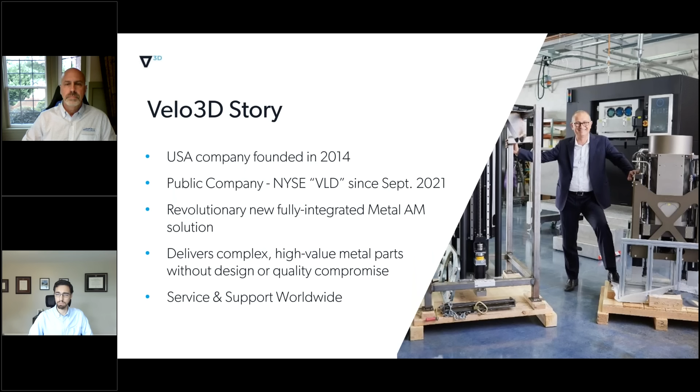Our intent was really to do a better job of managing the process that incumbent powder bed systems were deploying at the time. We quickly realized that we simply could not get to where we wanted to be with the hardware that was available at the time. So we ended up becoming a hardware company, and now we produce what we call a full stack solution, or an end-to-end manufacturing solution. We develop our software, our processes, and our equipment, all of our hardware, completely in-house, based in San Jose, California, with a fully US-based manufacturing team. Although we do support customers in Europe and in East Asia, so Japan, South Korea, and also Australia.

A little more about the type of companies that we work with. So we're predominantly an aerospace and defense company, although we do work extensively with some energy and oil and gas companies, as well as some other companies here and there. Most of who we work with, I would say maybe 50–60%, are in the launch space. So we work with a lot of launch companies, both new and old.

A lot of the folks that we work with are producing what we call high-value end-use components. So anything really in propulsion systems, thrust chambers, anything regeneratively cooled, different types of impellers, mixers, pre-burners, things of that nature. We also work with a lot of gas turbine companies, both for aviation and also energy generation.

We have a network of contract manufacturers that exist within the aerospace and defense supply base that have a variety of broad capabilities, not just additive capabilities, but they're CNC shops. They do a lot of post-processing, heat treatment, etc. That set of contract manufacturers also works with some of these customers who don't necessarily have systems in-house. So whether you're an OEM, or whether you are badged to the DoD and you're in supply depot or your procurement, there's lots of ways to work with Velo.

You don't necessarily have to have a system on site or in-house to get some parts made.

One thing I'll say is when you think about what a metal additive part is, one of the things we try to do as a company is demonstrate that we're not just making brackets anymore. We're not doing simple things, and we're not necessarily doing rapid prototyping for the sake of rapid prototyping. We're focused on producing high-value end-use components, things that go into propulsion systems, things that manage fluid, things that transfer heat. These are mission-critical parts that need very high standards of quality, typically certified by the FAA, NASA, or an equivalent DoD scheme, and they're things that typically haven't been done in a production setting with additive before.

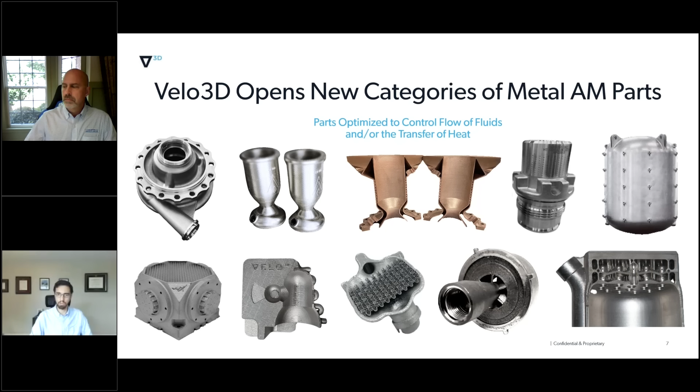The last thing that might be of interest to this crowd is we're a fully US-based company. We were founded in San Jose. We have an entirely US-based engineering team. The vast majority of our supply chain is also US-based, so most of our subcomponents we source from American or at least North American vendors. The things we do get from Asia, like chips, we get predominantly from South Korea, almost entirely. And all of our systems are manufactured in Fremont, California, which happens to be across the highway from the Tesla factory, which is kind of cool.

So that's all I'll say about Velo. And Gary, on to you. Have you switched the slide, Louise? There we go, okay, I did.

Yep, got it. So Hartech Group, we work exclusively with the federal government, specifically the DoD and a little bit with the DOE. We were born out of a need from the federal government for install and complete turnkey installations. What I mean by that, I'll give an example: we just put a large gantry CNC mill in at Tinker Air Force Base, and we did all of the concrete work, the electrical, the rigging, and the install of the machine. So when we were finished, it was a complete turnkey. We turned the keys over to the operators. They were trained, the maintenance people were trained, and they were up and running.

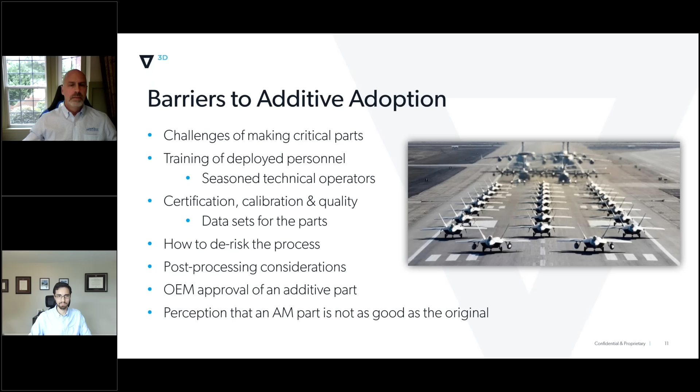Yeah, powder bed, which is all that we really do, I think the application for very near-theater is not quite there yet, just because of the operational complexities of the system. But when you talk about depots having spares, like MRO applications, where you need to get a spare out, and that spare might have been a casting, and God knows what that supply chain is like here in the States or somewhere else - that use case is kind of hitting the nail on the head when it comes to good use cases for powder bed fusion.

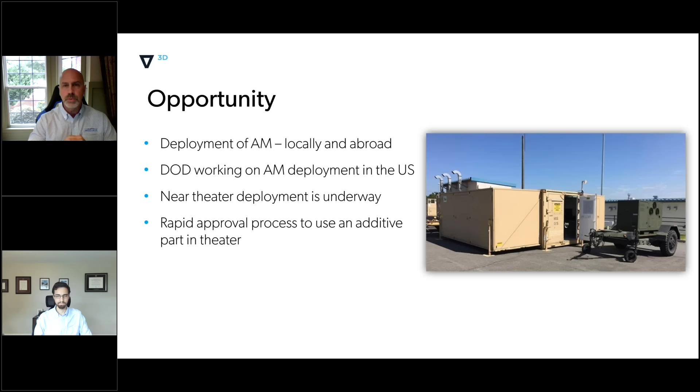Then the rapid approval process - we did touch on that a little on the first slide. There are different levels within the DoD and different branches - Army, Navy, Air Force, Marines - all have their levels of approval to get an additive part on. They're ramping that approval up in a lot of cases because they're having success stories. They see what an AM part can do for them. So I'm very happy to see that AM is pushing forward and moving as quickly as possible within the DoD.

All right, so we're going to move into a couple slides here where I'll just take the conversation that Gary and I just had and kind of retell it in the framework of Velo. So we've got a few problems and we have quite a few opportunities. And how does Velo address some of these problems, and how can we address some of these opportunities? I think we're taking questions as we go along, so if you do have questions, feel free to ask them.

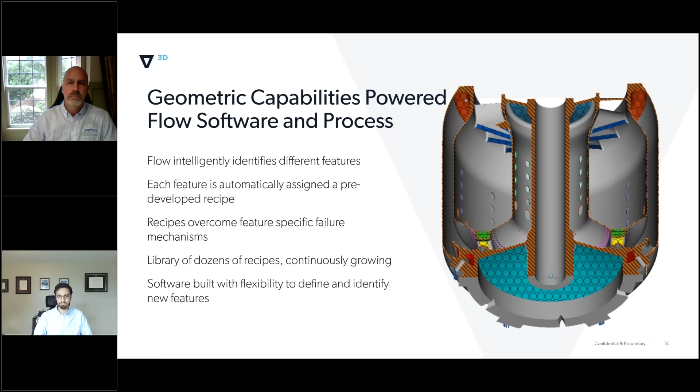We have a growing library of these sub-recipes. Every time a customer comes to us and says your processes aren't resolving this particular geometry very well, can you help us, we'll develop a process for that. We don't charge for any of it, we just load it back into Flow and push it out, and that way the product gets better. Every feature we have is because someone came to us and said you should do this, or it wasn't working on its own.

So that's Flow. Then we move into the Sapphire family of printers. We've got two platforms: the smaller Sapphire, which has a 315 millimeter diameter build plate, and the larger Sapphire XC, which has a 600 millimeter diameter build plate.

I use the word family for a good reason, because all of the parameters and processes run in one system are shared across all of them. The laser instructions for a particular recipe are the same. The only thing different is laser scheduling and how lasers are allocated to specific parts of the build plate. But what the laser is doing at a particular point in time for a particular geometry is identical. That gives you really great scalability.

You can develop something on a small Sapphire, and then when you have large enough quantities, you can upgrade to an XC, or work with a contract manufacturer that has an XC and get production level quantities made much more cost effectively than on the smaller system.

The smaller Sapphire has two 1 kilowatt lasers, and that 1 kilowatt is fully usable, and the larger XC has eight 1 kilowatt lasers. It's an argon, positive pressure environment, 50 micron standard layer thickness, which again goes back to the standardization of this process. And the calibration question is also incredibly important.

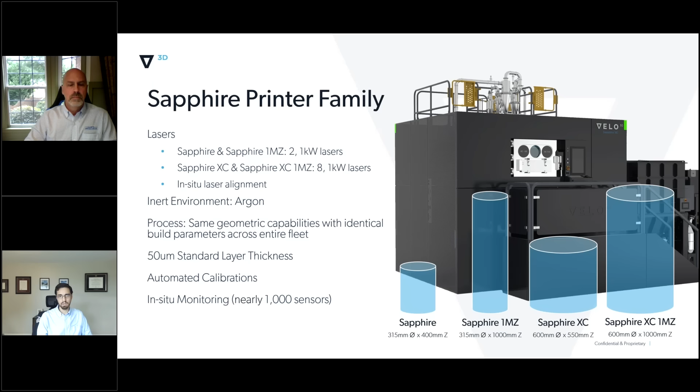The last thing I'll say about our system is that we take in situ monitoring very seriously. We have almost 1,000, closer to the mid-900s, sensors between synthetic and actual physical sensors measuring things all across the system constantly. We push all of that data to Assure, which we'll talk about next, to make sure the process is being run within the process window.

That goes back to, how do you know that you're getting a good part? You printed this thing and the machine did this, how do I actually know that what was done is what I wanted to happen? That's where Assure is such a big differentiator for us. It comes again with the system.

It reads data off of those sensors and off of a tool called Height Mapper. Height Mapper is just a structured light scanner, a laser that sits at the top of the build chamber and scans the build bed before and after recoat, and then after the laser, every single layer.

It also takes process monitoring data. We look at peak height, oxygen content, delta pressure in the filters, the whole argon system, and a whole bunch of other things.

And then we publish all this data in what we call build reports, anywhere from 3 to 5 page reports that will very quickly, succinctly, and in a very actionable way tell the operator whether or not the machine was calibrated and in spec, whether you're getting something quality, and whether you're getting the quality out of it that you expected to.

And again, it's a big differentiator. There are other third-party softwares and tools that you can get and integrate, but because this is integrated into the product from the beginning, and they talk to each other very seamlessly, we feel like the ease of use and the quality and consistency you get out of Assure is great.

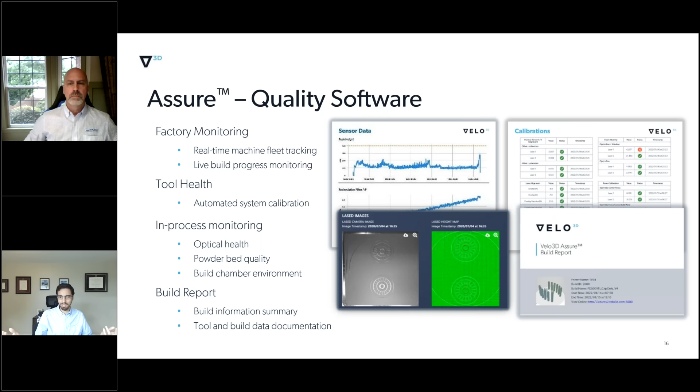We're really excited about M300. We're looking at predominantly automotive die casting applications. So if you have tool inserts that have cooling channels in them, you want those cooling channels to be as large as possible and also as smooth and good as possible. We've seen some pretty good distinguishing capabilities on our system over others for tool steel. And that allows you to do other types of applications, not just die cast inserts.

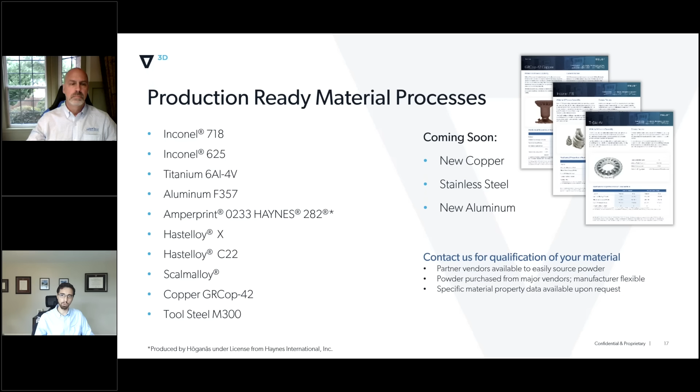We are working on an alternative to GRCOP-42, which is a little less expensive and more available. Stainless, we've got a couple of stainless steels we're working on, and also considering a couple new as well. So if you don't see the alloy that you need, that's okay, come talk to us. There's a good chance we're either working on it or we can get it for you.

What we're motivated to do as a commercial team and as a technology team is to make people successful. That's how we measure success. So when it comes to understanding how to slice parts, any development that has to be done, working with OEMs—which we already have relationships with all of the major OEMs—talking to engineers, talking to people in certification agencies like NASA and the FAA, we might not necessarily be able to do a lot of that for you, but at the very least, what we can do, we will. And what we can't do, we can help you based on our prior expertise to point you in the right direction.

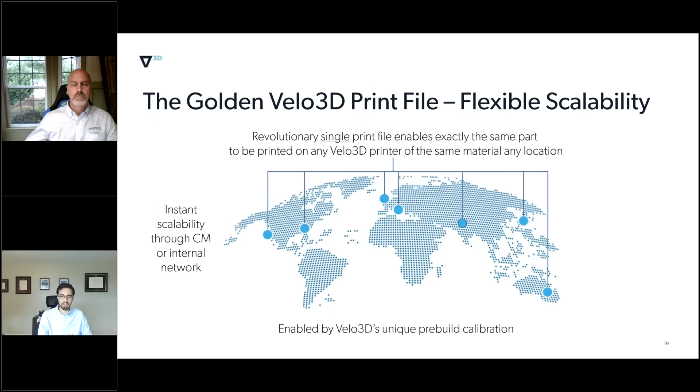The real magic of this, particularly for DoD MRO applications, is that you don't have to be in a position where you're reslicing or managing files, dealing with STLs, and dealing with different machines in different calibration states. That doesn't have to happen anymore. Today, it's a nightmare—if you have a couple different machines, those machines in two years might be in a different calibration state, and there's a chance you're probably going to have to reslice. There's a lot less certainty that what you get is what you expect.

Because none of that is really true on the Sapphire, you get one thing, one build file, whether you want it today, in 2 years, or in 5 years—no matter what software version that system is running, it's going to run the same parameters, because the parameters are embedded in the file itself, which is a massive differentiator. Everyone else will essentially take a tessellation, load it into the machine, and the machine will decide how to deploy parameters on each layer, so the files are bigger, but the benefit is there's one file. If you're working off a central repository of approved files for particular parts, that's one file. So whether you're operating a vehicle and need something printed in Germany, at a base in the States, or at a base in Japan, it doesn't matter, because it's the same file and you're pulling the exact same file. Huge, massive differentiator.

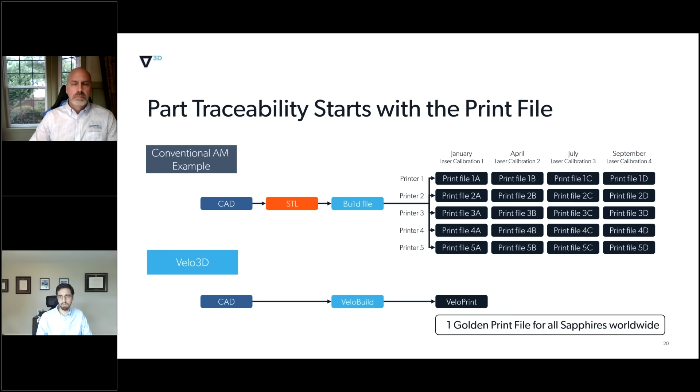And then we'll talk a little bit about qualification. This is obviously a huge topic, so I won't go into it too much in this forum, but I'm very happy to answer questions after the fact.

We think about qualification in three different steps, or three different phases. One is material qualification - what are the properties that you're going to get out of this material? Tensile properties, elongation, cryo properties, whatever it might be. And we're doing that through standards - MMPDS and NACE are the two we're working with today.

The goal is to have all of our alloys qualified. We're currently closing up on 718, although that data has not been published yet. What that allows a customer to do is call out MMPDS standard X, Y, Z - Inconel 718 - and put that on your drawing, and that's going to reference a set of properties you can call out. Because the processes are the same on all the machines, you're going to get the same properties, and the properties will be within the same family.

Then you go into Sapphire qualification. When you land a machine, there's a set of qualification builds that you have to print. We have a standard set of builds, and typically customers will have their own builds too. That drives machine consistency, so we know this particular machine has been calibrated, all the systems are working together nicely, everything's working as expected. When we run this particular parameter on this particular type of part, we're going to get the same properties and the same result. So when you land the machine, you'll go through a qualification process to make sure what you're getting is within the family of the allowables you've published, the MMPDS allowables.

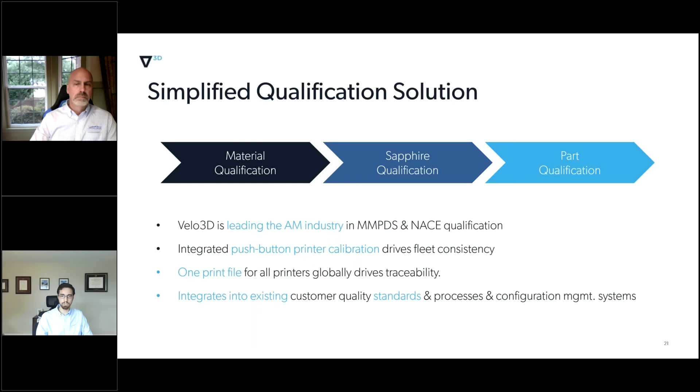You don't have to finagle with properties or who's the vendor or what process they're running. Is it the same as the process this other guy was running? Is the process the same as two years ago? All those things are just no longer relevant questions. So even from a supplier management perspective, whether you're DoD or work for an OEM supporting a DoD customer, it just really makes things a lot easier.

And then we can talk about a couple of real world examples. This will be pretty casual. We have a lot of customers that maybe do a better job of marketing us than we do. Launcher is one of those. Launcher has a couple of our systems, and we have a really phenomenal working relationship with them. Their E2 engine has quite a few components that are printed on our system.

They print components on a competitor system too, but a lot of the volutes, particularly the geometries you see at the bottom of that stack, are printed on our system. This will launch in 2024, so it hasn't flown yet, but I think it's the highest performing kerolox engine ever designed. We have a lot of components, both static and rotating. We do rotating components - some people tend to shy away from that for additive parts, but we've seen a lot of success with rotating turbo machinery.

Just to reiterate a point made earlier, these are production parts, and they're complicated production parts. So it's not just for prototyping. These are flight ready, flight critical parts. Launcher is going to be certifying this engine with NASA the same way that all of our other launch customers certify the engines they're making with NASA for unmanned and manned spaceflight. And these are production parts. It's not like they're going to make a prototype and then cast all these things in production. Their plan is to print these things forever, right? That's the production solution.

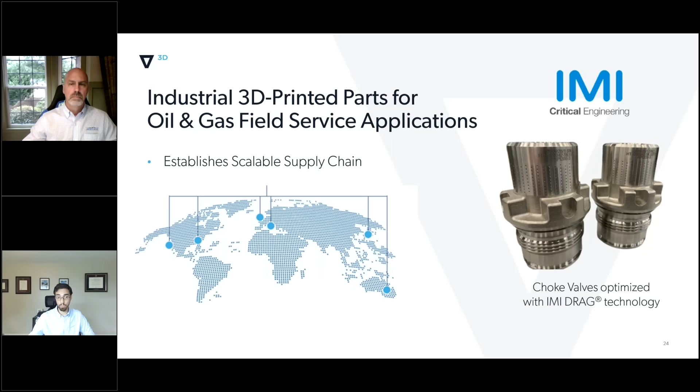So really great use case, again leaning on the supply chain flexibility we provide, as well as the geometric capability, which is still a foundational part of what we do, which we actually haven't talked about much today. Maybe we can talk a little bit about that on this part. One of the things that's also a differentiator for us is our geometric flexibility. There are parts you can make on our system that are physically impossible to make on other laser powder bed systems.

That is not an exaggeration. There's a rule of thumb in metal additive manufacturing, which is 45 degrees - you can't go below that. There are certain exceptions that people have proved out elsewhere. But what we like to say is that you can go down to near 0 degrees as long as you're adequately constrained in certain ways. That allows you to print overhangs way lower than 45 degrees and accomplish parts that would be too challenging to make because you'd have to support them.

This is a good example of that. There's a flange on the inside of this housing which is about 10 or 15 degrees. There's a couple other low angle overhangs at the bottom of this housing, also between 10 and 20 degrees. And there are other parts with lower overhangs as well, especially shroud impellers, that we can now do.

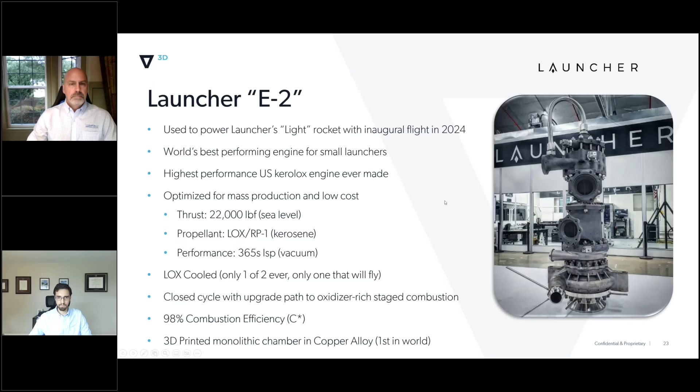Did you have anything to say to that, Barry? I think it's an extremely valid point because post-processing is an issue, certainly for anybody here doing production. But if you can eliminate that for a foot soldier being deployed, it's a big factor, and less chance that you're going to have a part destroyed because somebody ground away the wrong piece or ground too deep into a part.

That's the thing we're up against all the time - the industry tells you, oh, you can do whatever you want, except this and that, right? There are legitimate physics-based reasons why a lot of those things cannot happen, and there's certainly things we can't do either. But philosophically, our goal as a company was to allow people to make the part they want to make, not the part they can make - a lot of that is designing for additive manufacturing.

We have this whole 'death to DFAM' slogan - I don't think it's caught on, but the message is that we want you to bring the part you want to make and not have to make compromises to get it done. The customers that come to us often do so for this reason first - I've got to make this part, it's got to be this way, I can't not have it this way.

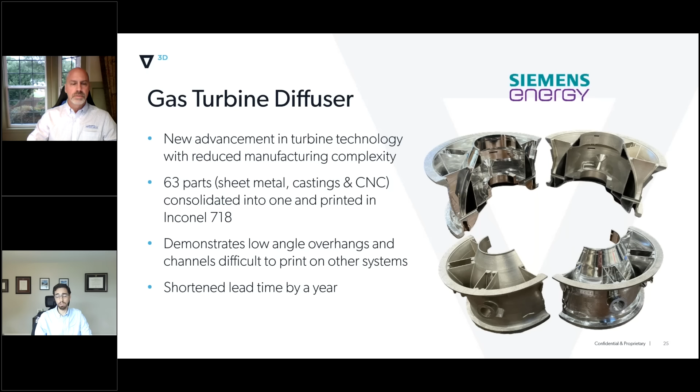And then they realize that there are all of these supply chain benefits, and that just makes the cake even sweeter, right? Because they get to have their cake and eat it too. I get to make the part that I want to make, I don't have to make the compromises I want to make, and also it's just a way easier story to sell to supply chain. There's a lot of benefits all around. Yep, agreed.